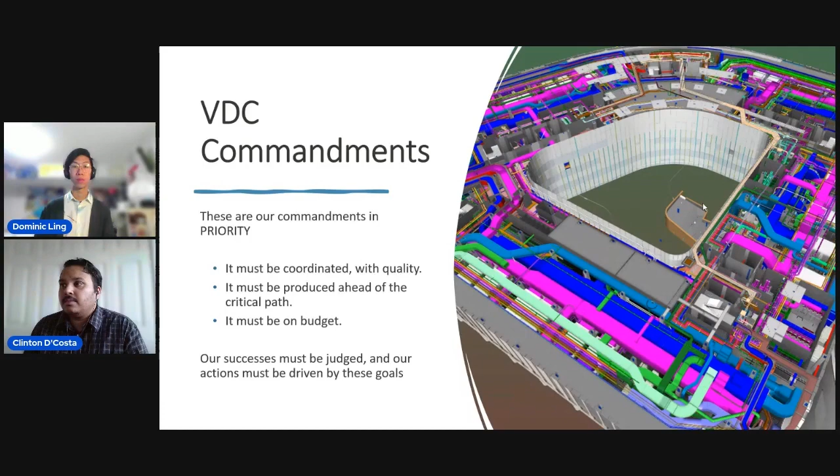The following items are some of the actions that the Modern Niagara team performed in order to ensure a successful project for the Calgary Cancer Centre. Modern Niagara worked alongside our consultants to integrate our QA/QC processes where changes would impact our design. Our site team and VDC worked together to audit our duct and piping systems for sizing and flow characteristics, where any findings were brought up with the consultants or RFI'd as they were discovered. This helped to avoid future headaches down the line in order to mitigate having installed pipe or duct systems that were either oversized or undersized.

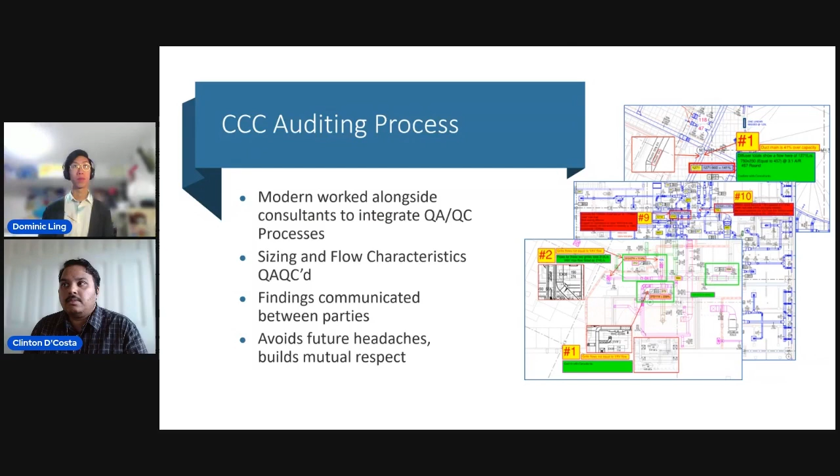Another challenge that our VDC team led the charge on was the focus on end user accessibility. The client needs accessibility for the maintenance of the building. What we strove to do was persevere for the user perspective on access and maintenance. We took a look at our design and thought about what is user-friendly and accessible. How will the client access equipment, and how will maintenance be performed on key equipment?

An example of such situations was where we had multiple stair pressurization units. They were stacked in a triple arrangement with 4 layers of drywall enclosure between them, as well as located above a pump skid, where it would have been an extreme challenge to maintain the units in this condition. Our team flagged this issue and proposed alternative locations for each stair pressurization unit where access and maintenance clearances could be maintained, as well as avoiding the 4 layers of drywall enclosures. Stair pressurization units were eventually relocated closer to their endpoints, which helped to reduce further coordination issues down the line.

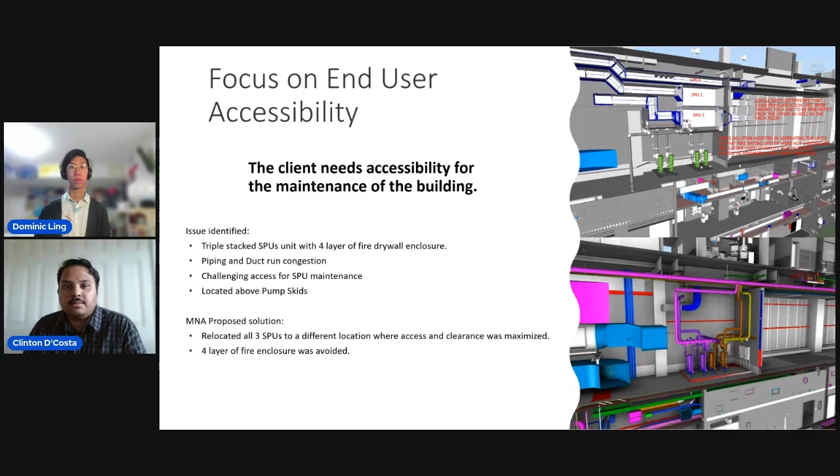The Calgary Cancer Centre also required one of the strictest as-built tolerances in the industry. To achieve this, we implemented a QA/QC endeavor using a LiDAR scan of portions of the Calgary Cancer Centre to verify the accuracy of the installation and the site conditions. The LiDAR scan generated a highly detailed point cloud model that was imported into our shared 3D workspace, in this case Navisworks, and it was used to compare against our 3D trade models.

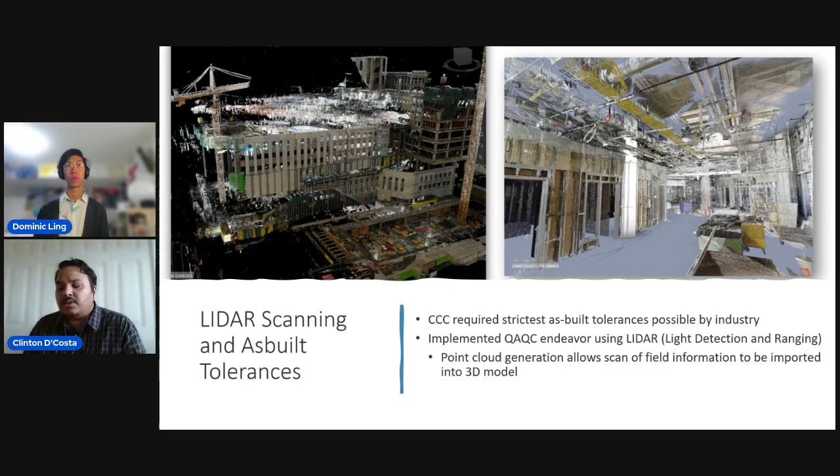Upon validating the point cloud model against the 3D trade models, we were able to verify that over 85% of the building was within industry standards of 50 to 250 mm, depending on the discipline. Anything outside of this range was updated in our model through our as-built processes.

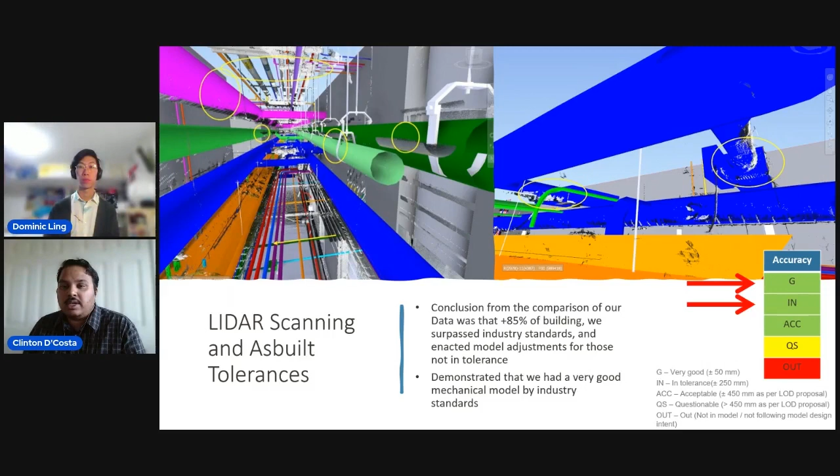Modern Niagara is extremely proud of the end product that was created on the Calgary Cancer Centre project, and this level of accuracy maintained from design to installation is crucial in the creation and development of an accurate digital twin of the building.

Some of the key solutions that Modern identified to ensure VDC engagement throughout the design and construction phase were: more attention and mobilization must be given to VDC early on, to allow the team to get ahead and stay ahead. Site installers must be given time to buy in and provide feedback on plans prior to install. VDC must engage and collaborate with the site team.

We have to promote model walkthroughs between all parties, whether that's the site or the VDC teams. That allows comfort to be built with both teams and allows for a cleaner install and issues to be brought forward. The constant communication of any site change was also extremely key, as deviations needed to be communicated between all team members.

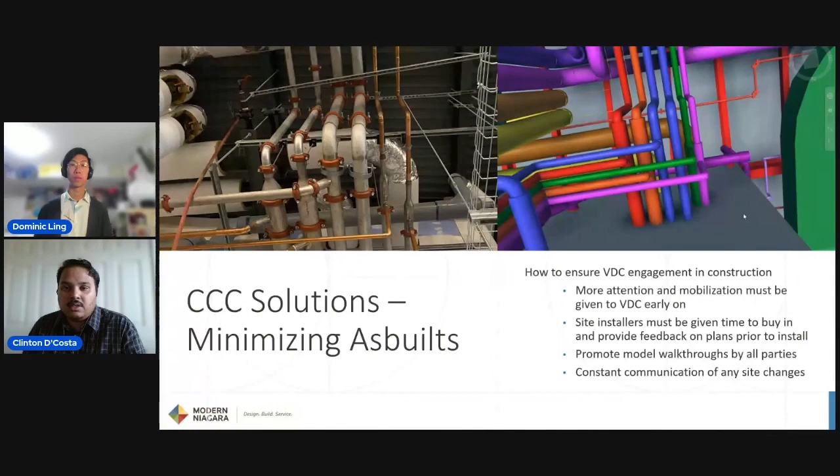Another complex area within the Calgary Cancer Centre project was the lab space in the high podium curved areas. This proved challenging due to a distribution of low beams, reducing significant ceiling space, as well as an angled floor plan, which meant the use of a lot of custom fittings through our duct and piping systems. The ductwork design also required the use of phoenix valves, for which accessibility and maintenance had to be accounted for. This was all due to the unique shape of the building.

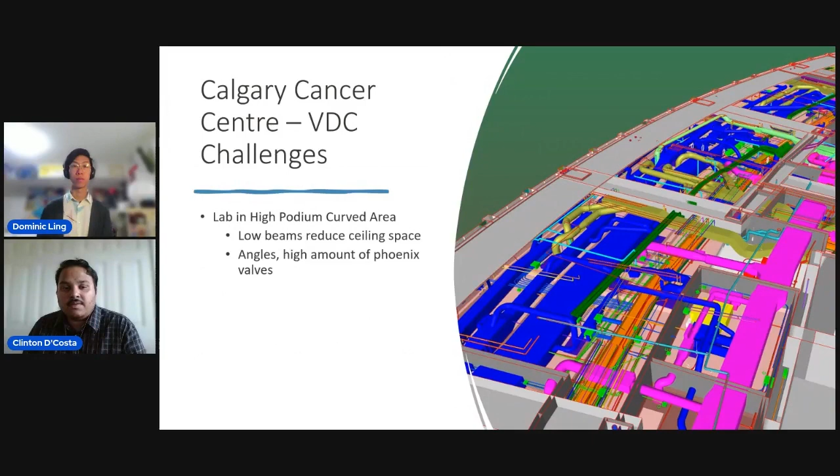Another area of high interest was the Linac maze and the innovation vaults. This was an extremely complex space that contained CNSC approved radiation shielding using concrete and lead enclosures, an RF bunker with thick concrete rooms to prevent the MRI radiation, cryogenic exhaust requirements, which include our quench vent systems, as well as constant design flux and concrete shielding penetrations that needed to be accounted for, as well as restricted access to our piping and sprinkler systems.

These rooms were extremely complex and required a significant amount of collaboration between all the trades, the GC, the province, and the MRI manufacturer. Any challenges that were found were resolved over months of meetings. Some of those include: penetrations through shielding were extremely complex. The lead shielding door required significant multi-trade coordination. The lead bulkhead design required numerous iterations to achieve installation, and the MRI equipment was extremely leading edge, so design details were coming in through construction that needed to be accounted for.

The root cause of some of these problems would have been design teams assuming the design is complete too early on. You have to understand that it's an extremely iterative process where reviews and team collaboration are required to facilitate a quality product. The solution for Modern's end was to provide a dedicated resource to this area, who would focus on investigating all design requirements, including those of the other parties, prompt the GC and consultants about design inconsistencies, and push to facilitate communication between all parties. The key is to provide multiple design options to the GC and consultants.

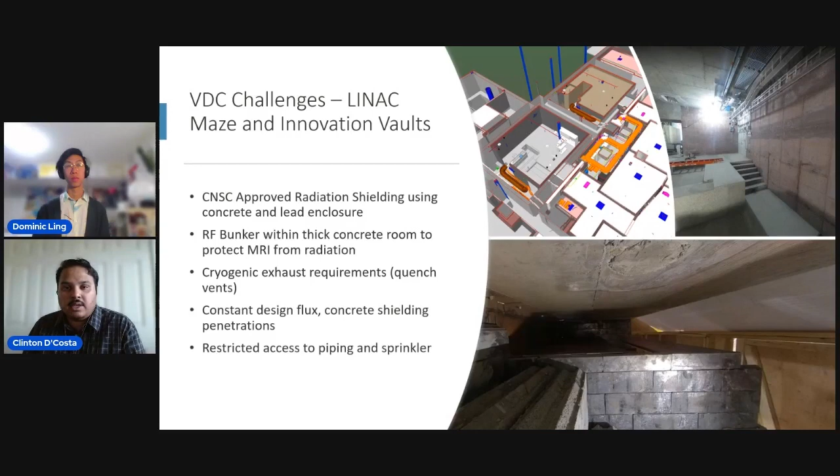It's about providing solutions, not just issues. And then understanding that this whole thing is going to be a very collaborative and iterative process. So you're not going to get it right on the first bat. It's a lot of work with the team.

So, to provide a brief overview of the VDC solution strategies, the key is maintaining communication with all site trade partners and the GC, utilizing a shared 3D workspace for coordination, whether that's Revizto or Navisworks, and finally getting ahead, staying ahead, and being proactive.

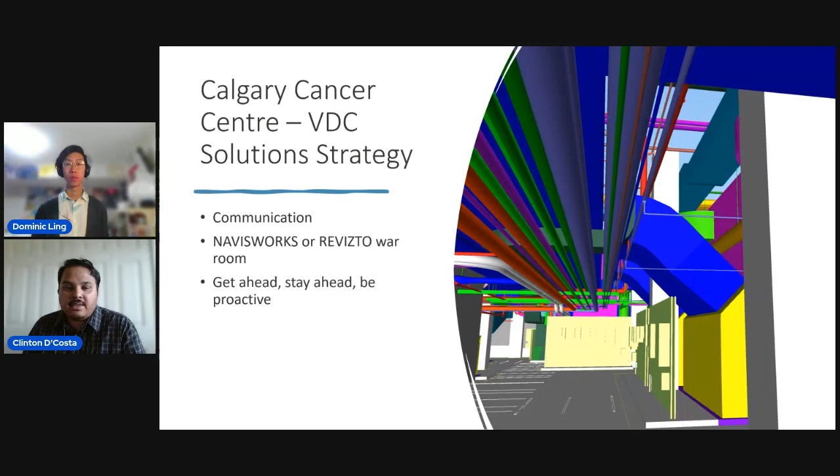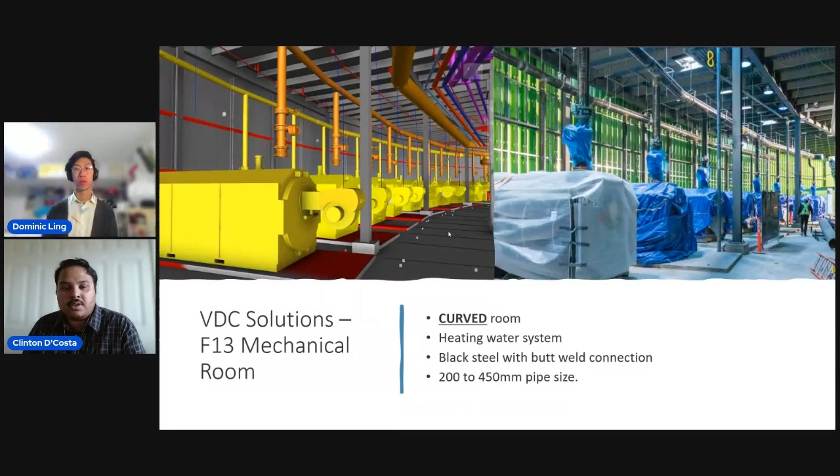Through all of that, coordination was able to achieve really good results of model versus installation, such as this curved mechanical room on the 13th floor. Curved mechanical rooms were extremely hard because there's a requirement for custom angled fittings, which comes with increased coordination. Positioning on site with the angles is extremely difficult. That was facilitated, and considering expansion of your pipe systems when utilizing the custom angles is also a challenge.

Here's a quick demonstration of the successes of our prefab endeavor with the installation of the curved hot water header. This goes to show that VDC is not an unknown party behind the computer. We're actively working with our site teams to install a quality product for our clients.

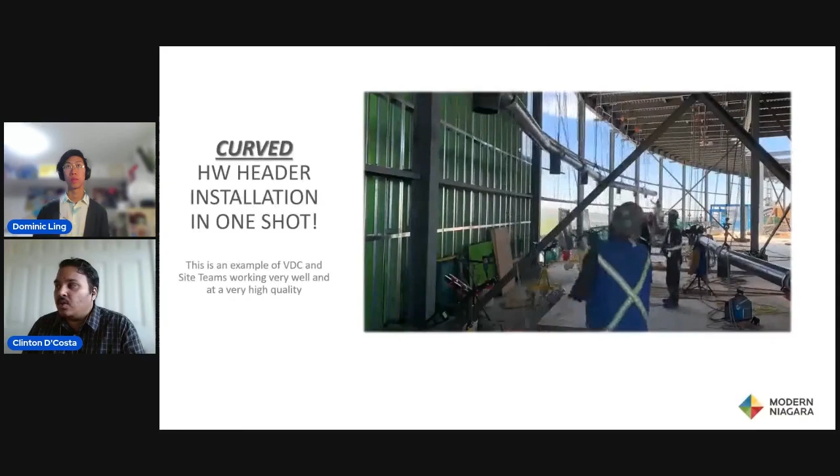And part of that solution is through prefabrication. There's a substantial amount of equipment where field fitting, coordination, and pipework would have been extremely time-consuming and costly. Prefab is beneficial because it increases safety in a controlled workspace. Space management on site is a requirement because it's always a premium. So pushing that into our shops, we are able to control less manpower on site, as well as increase our quality control and deliver a higher quality product to the owner or to the client, as well as reduce material waste, and finally deliver the product on time.

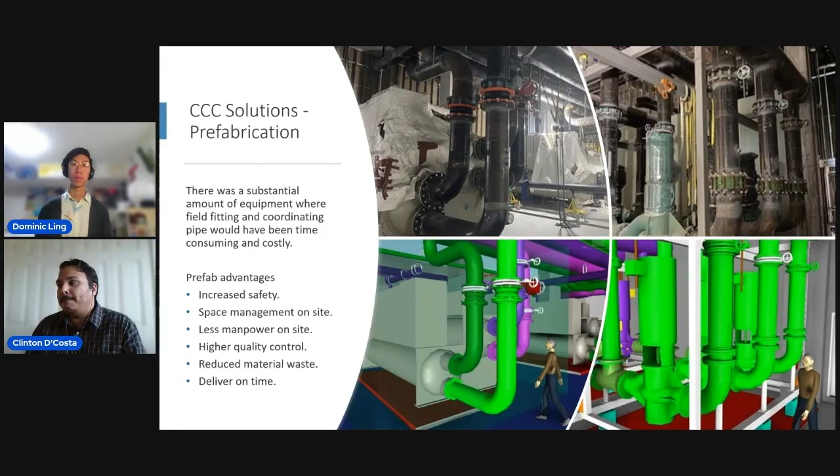Thanks, Clinton. So another example of our VDC solutions was the issue of carriers. Carriers are what support toilets and sinks, and they determine the clearance and placement of sleeves for the plumbing. More often than not, this clearance gets missed on the first iteration when walls are designed, so there's not enough space in the chase for the sleeves.

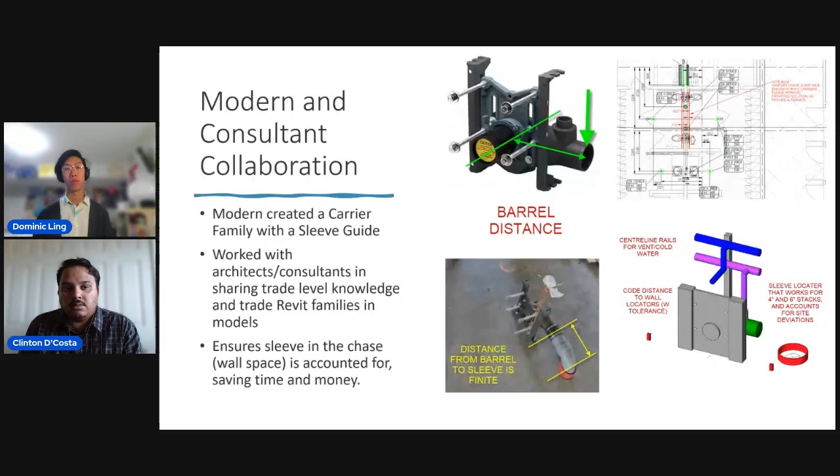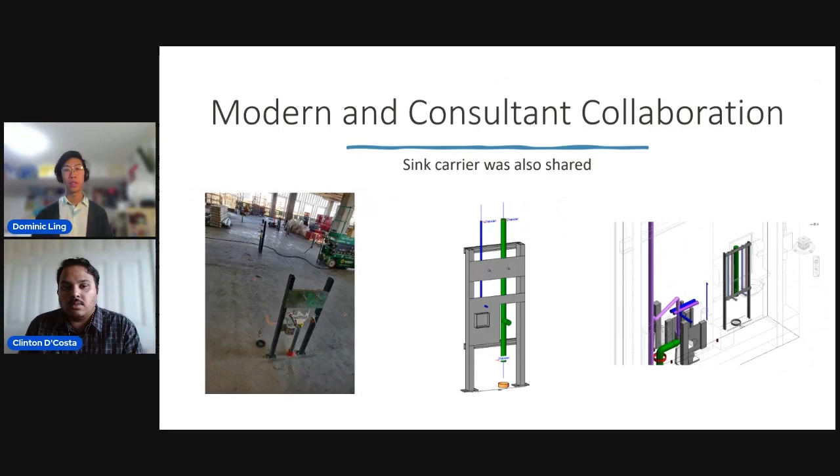We created our own carrier family complete with a sleeve guide and shared it with the architects and consultants. In doing so, we shared trade level knowledge as well. This ensured the sleeve in the chase is accounted for during the design phase, and in doing so, saves the project team hundreds of RFIs and likely tens of thousands of dollars in project losses. And these are just some shots to show we did the same thing with the sink carriers. Again, this solved a lot of headaches with the chase not having the proper clearance through a clever VDC solution.

There were thousands of VDC hours and effort that went into everything we just showed you. There was over 770,000 linear feet of pipe drawn and about 3 million pounds of sheet metal drawn, and over 510 spools were created. Now that we have a cool coordinated 3D model, what do you do with it? How do you translate and utilize this data to the life cycle of the project?

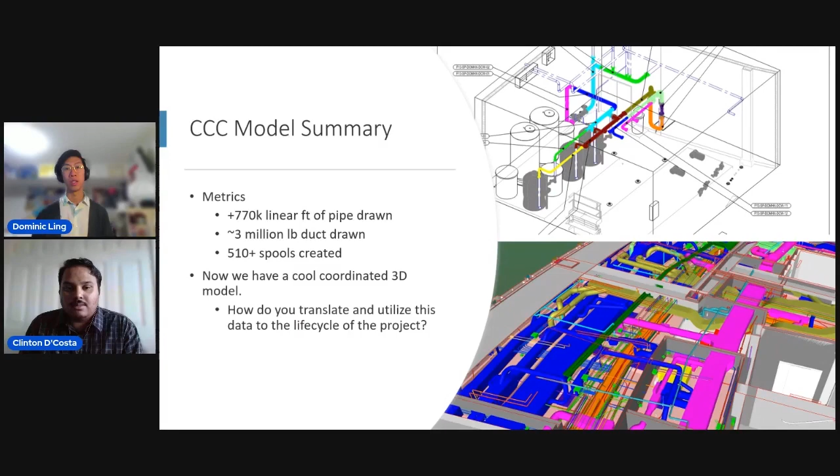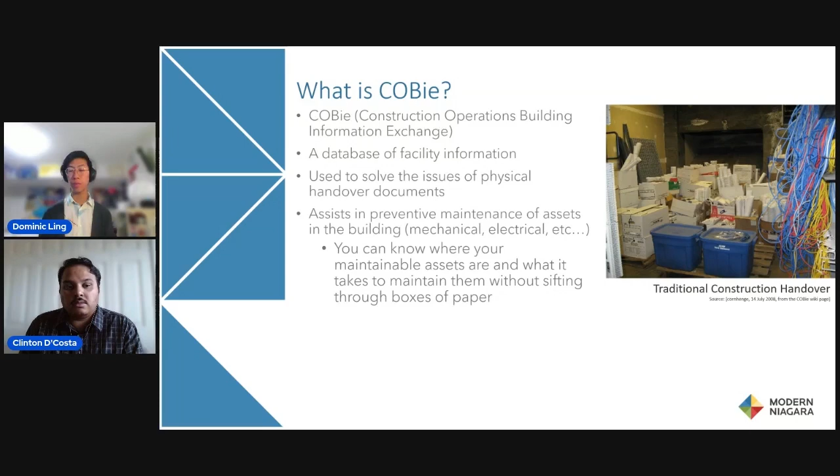So again, COBie is a database of facility information that can be integrated into a client's computerized maintenance management system of their choice, or CMMS. A CMMS is how building services maintain a facility, and it aids with location, service dates, diagnosis, all those things. If you take a look at the example of the iPad on the right, there's a CMMS running on there. How it would be used, you would pull up a floor plan or list of equipment. You can click on the equipment you're trying to look for and instantly see where it is, how it's running, how it's maintained, when it's due for service, who made it.

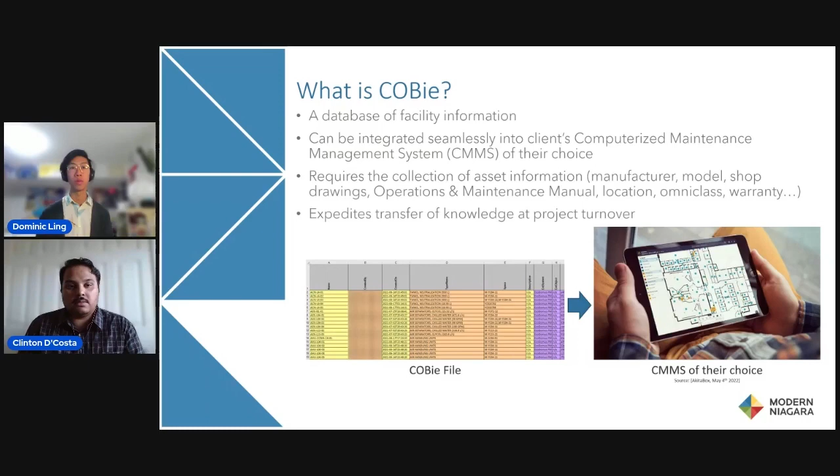And it really helps with technicians finding where they need to go in the building to work on it and knowing how something is operated and maintained. And the owner can add data to this system after the fact. So it's way faster than opening up a binder. Our workflow for the COBie file creation on the Calgary Cancer Centre actually won us a Building Transformations Innovation Spotlight Award for 2021 in the category of Digital Supply Chain.

And what was the background of that award? So the Calgary Cancer Centre required the largest and most complex COBie deliverable to date in Canada. It had more than 80,000 data points, multiple data sources, and no previously defined workflow for a job at this scale. It was the first large-scale 3D digital twin of its kind in Canada. In order to capture all this data, minimize error, and track progress, we had to create our own workflow and tracking systems.

We had data sources coming in from multiple locations. There was Revit, which is our 3D modeling platform, and it provided the spatial information, CxAlloy, which was the commissioning platform for all the equipment, and equipment shop drawings and submittals, from which information on the equipment itself was obtained, such as make and model. Data existed in multiple sources and fed into each other. A centralized platform to compile data was required.

EcoDomus was chosen as the centralized platform. A third-party software, we used it to compile all the data into a single COBie file for submission to the client. Having this common pool for all the data to be fed into solved the delineation of data sources.

Yeah, so the dashboard. So we still needed a way to do some quality assurance and quality checks on the data as it flowed from our sources into EcoDomus and then into the COBie file. We needed a way to prove accountability to leadership and management. To solve this, we created our own QC dashboard, which checked for completion and consistency between all data sources.

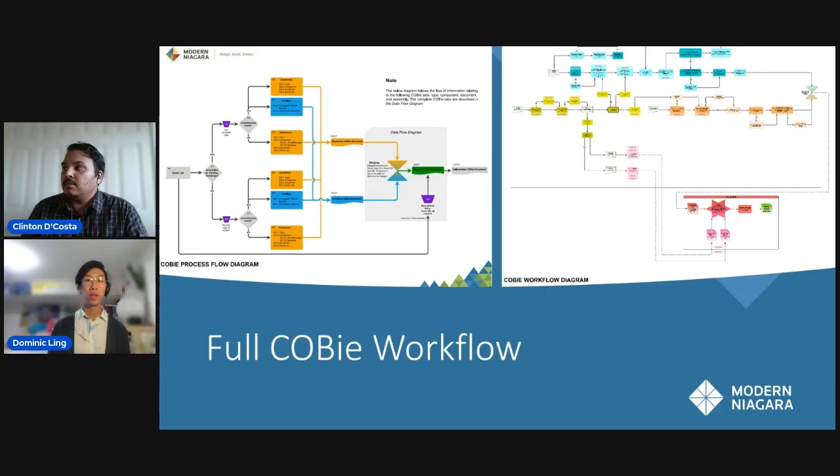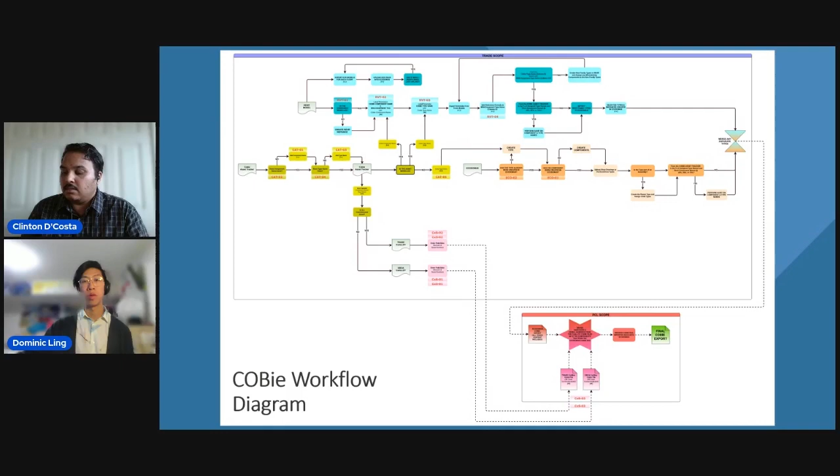This is the full COBie workflow, and it was as complex as running a computer program. I won't spend too long explaining each of these, but this one represents the data flow all the way from an asset list to the final COBie deliverable. And this one detailed the entire workflow from Revit to CX Alloy and EcoDomus, and their accompanying QC processes. It included not just Modern Niagara scope, but showed how we interface with PCL and the commissioning agents.

But to simplify, this is a simplified version of our workflow. Shop drawing information was filled in on our QC dashboard and auto-populated into Revit. Revit was fed into EcoDomus for spatial data alongside the shop drawing information. CX Alloy fed in commissioning info into EcoDomus, and EcoDomus was used to create the final COBie file. And throughout everything, the QC dashboard ensured consistency across the board. 80,000 data points across Revit, CX Alloy, EcoDomus, and the final COBie deliverable. It was a whirlwind of QC focused on the dashboard.

In conclusion, our challenging project scope and data capture logistics were tackled by robust workflow, tracking systems, QC processes, culminating in an effective digital supply chain. We collected 80,000 data points for the CCC COBie file and wrangled it together with no previously defined workflow to produce the largest COBie deliverable to date in Canada.

The inclusion of COBie into the digital twin model further enhances an owner's ability to manage, maintain, and operate their facilities efficiently and cost-effectively. We've been told that facility management input can take up to 1.5 years for a project of this size. As such, we save not only the owner's labor cost of managing and inputting that data, but also the 1.5 years of unknown facility status risk associated with that data, which is huge.

So what does this mean for the industry, and where do we go from here? As we continue to leverage construction teams with BIM technology, we empower the engineering and construction industries to provide their services and expertise to a growing market.

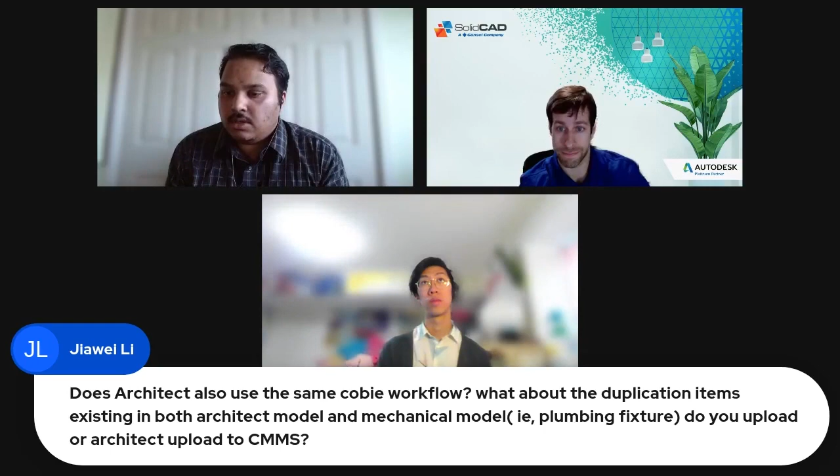Was there any challenge in implementing COBie due to the file size of the project, or even the size of the project itself? There's always going to be issues. I think those issues come with Revit more than the COBie file itself, and that's just the nature of Revit, really, managing all of that data in there, right? So as your models get heavy, you just have to do your best data practices on those models to keep them light, right? So sure, more data, more problems, right? Yeah, exactly. More data, more problems.

Did you purchase the architect model, or was it shared? I mean, how freely was the data exchanged between consultants and Modern? On the Calgary Cancer Centre, we did have a live link into their model available. So it was a shared collaborative workspace. It was all on the BIM 360 ACC, Autodesk, whatever they rename it to. Autodesk Construction Cloud, yeah. Construction Cloud now.

But I think that would probably be one of the most critical parts of your business, is having that model cloud hosted, which was secure and available to all the parties involved, right? Correct. Yes. How long was the process for this project, or for this size of project? So I know that when I visited the job site, Chris Little was describing how fast things were moving in the trailers. While things were pouring, you guys were designing and updating the next level.

Yeah, well, that's the nature of the design build process on this job. So the project started in 2018, and it's coming to a close in 2022. The COBie aspect of it probably lasted about a year, within the last year during the commissioning phase. Yeah.